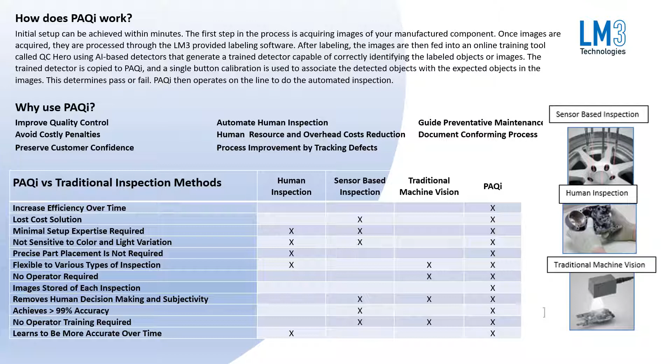PAQi is being used by very big and small American businesses, such as Cooper Standard, Magna, Lear Corporation, Yanfeng, Bayer, Steelcase, CK Technologies, Cascade Engineering, and AGS Technology.

Using PAQi to do physical measurements requires a one-time NI-VBAI license, which runs at approximately $850. QC Hero for detector training is a pay-per-use web-based system at $20 an hour. A complex object detector usually trains in less than 3 hours, or $60 per training session.

LM3 can be hired to do system customization. LM3 also provides affordable accessories including lighting controllers, I/O, breakout boxes and cables, buttons, and LEDs to round out the system and avoid the need for high-cost integration.

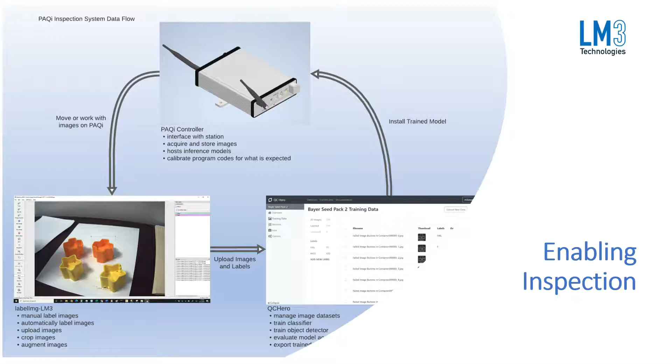The main components inside the PAQi include an Intel NUC running Windows 10 Pro with a solid-state M2 internal hard drive and up to 32 gigabytes of RAM. National Instruments image processing software called VBAI, Vision Builder Automated Inspection, allows a setup to inspect parts and pass or reject using machine vision.

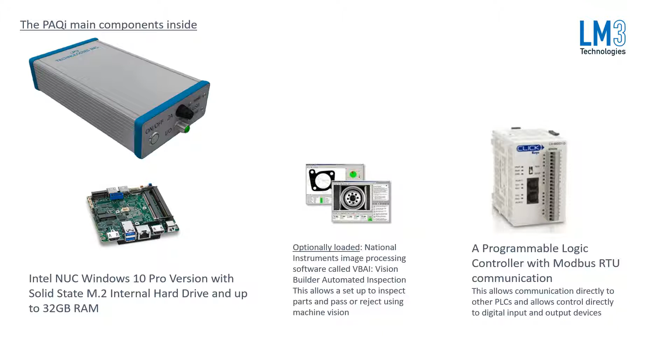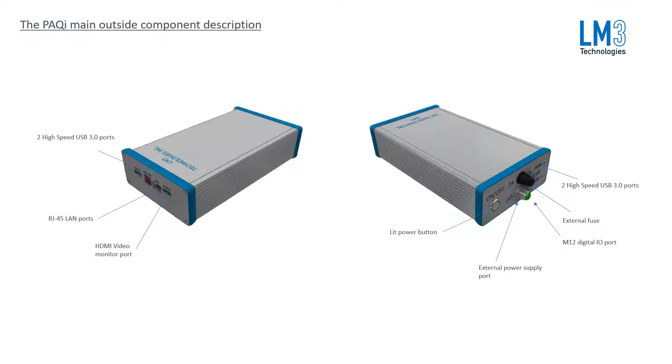Outside of the PAQi, we can see 2 high-speed USB 3 ports, RJ45 LAN ports, an HDMI video monitor port, a lit power button, an external power supply port, an external fuse, and an M12 digital I/O port, as well as 2 high-speed USB 3 ports.

LAN ports allow connectivity to the plant network to store info, transmit failure information, external port-in capability, and communication to MES via Modbus TCP. There's also a lit on/off indicator showing power status at a glance, and fuse-protected internal components. Digital I/O can run stack lighting for visibility or other outputs to external devices, and receive sensor signals to trigger the cycle.

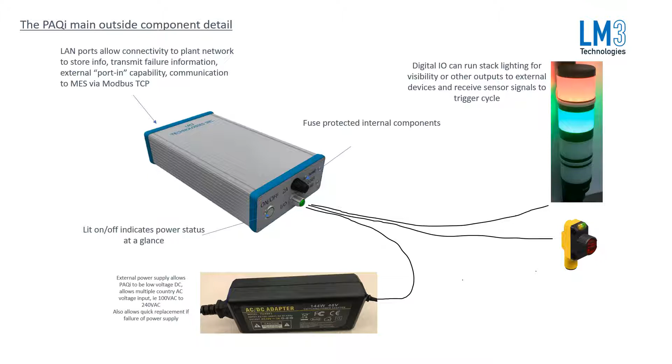External power supply allows the PAQi to run on low voltage DC, allowing multiple country AC voltage input, meaning internationally and within the US. Video output ports allow connection of a monitor to display failures, status, detection information, program setup, and change screens. The digital input allows cycle start, part presence sensors, and light curtain input.

USB ports allow connection to a mouse, keyboard, scanner, printer, etc. The PAQi can also be connected to both Wi-Fi and Bluetooth support.

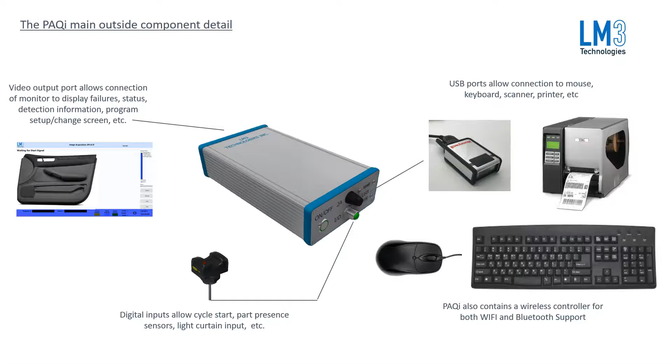Regarding its history, the PAQi was created in 2017. Its first goal was to have a camera device or system that, when triggered, would simply take a photo and save it to a file locally or over the network. The second goal was to link the photo to the product for traceability.

This was initially designed to be triggered by the scan of the product's serial number, resulting in an image stored by that serial number. The purpose was to have traceability pictures for the customer as proof of assembly and assistance in problem solving. Many other cases were similar, and the pictures are named by unique serial number, commonly referred to as warranty photos.

The third goal was to have a unit which could break the price barrier of traditional systems. Current vision systems are expensive, and by reducing the cost of hardware, customers can deploy machine vision analysis across a wider range of applications, leading to a quality control standard.

The system would have to be simple and low cost, such that if there was a failure, it would be quicker to unplug the unit, install a new unit with the program, and be back in production very quickly. The system would also have to be able to handle multiple cameras.

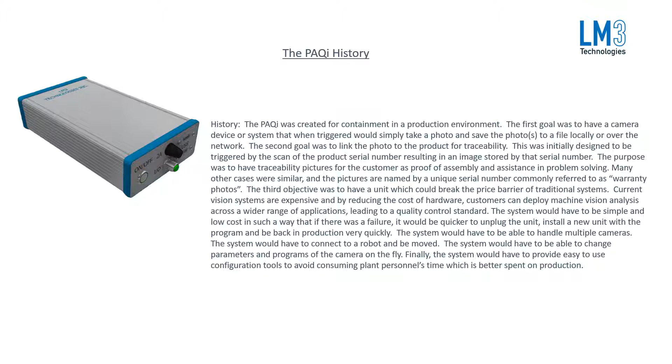The PAQi Functionality Overview 1, the simplest function, is for the PAQi to take photos and store them to a file. The PAQi waits at the start position for a trigger, and once received, it scans the barcode of the part being inspected, captures an image, stores it to the network or locally, and records the results to the station.

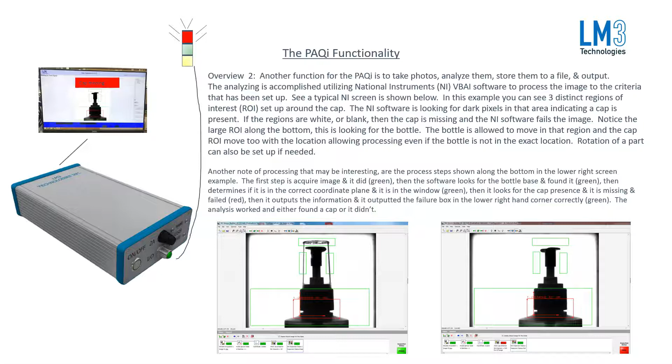The function for the PAQi which takes photos, analyzes them, stores them to file, and outputs information utilizes a licensed version of VBAI loaded into the PAQi. Utilizing this software, or the AI-based setup, can be done by anyone.

The PAQi is used to take photos, analyze them, and store them to a file and output information. This utilizes a licensed version of VBAI loaded into the PAQi. Utilizing the VBAI software, or our AI-based detector training using QC Hero, the user can set up the areas of interest to be inspected. The regions can be set up by anyone, internally or externally.

The analysis is done from multiple images. This is where lighting and resolution are important for the user to develop a repeatable photo that highlights the components or areas that need to be evaluated. This may also involve using different light color patterns or options, as well as UV or IR lighting.

NI offers many tools to evaluate images, including color intensity, intensity detection, particle detection, etc. This allows the analysis to be robust. Using AI-based inspection provides a machine learning-based means to do object and defect detection and classification.

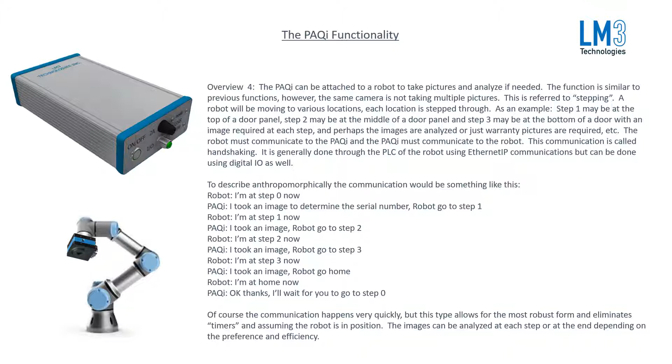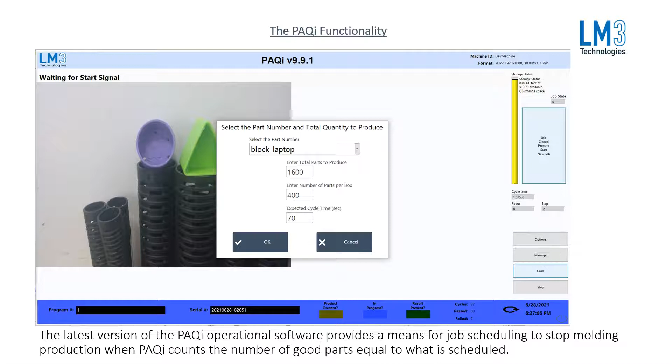The latest version of the PAQi operational software provides a means for job scheduling to stop molding production when PAQi counts the number of good parts equal to what is scheduled.

In production count mode, the PAQi senses when the cycle time of production exceeds expected cycle time and requires the operator to select a reason for the downtime, which allows us to track downtime across the entire job and report OEE metrics.

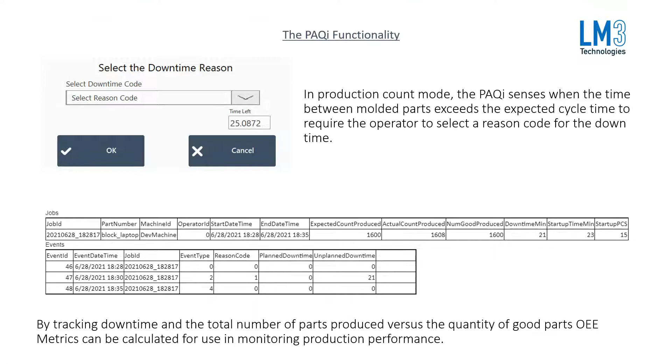Under all circumstances, PAQi stores results to a SQL server, whether it be a local one or one on your network. All individual step results, whether from VBAI measurements or detectors, are stored by their score or measurement value in reference to the image that was taken. This allows for more advanced analysis of production performance.

PAQi is used for a multitude of inspection requirements, including feature presence, defect detection, color classification, physical measurements, and traditional machine vision operation, as well as a combination of object detection and classification, and object detection and object measurement.

Additionally, PAQi can be used to control the entire station or be subordinate to the station's main controller.

Finally, parts can be loosely or not at all fixtured due to PAQi's ability to do object detection anywhere in the field of view, even with inconsistent lighting.

This functionality is powered by artificial intelligence such that a detector or detectors are trained using QC Hero to do object detection of any object in the field of view, including defective objects, or classification, which involves categorizing the entire image in order to determine if it meets the inspection requirements.

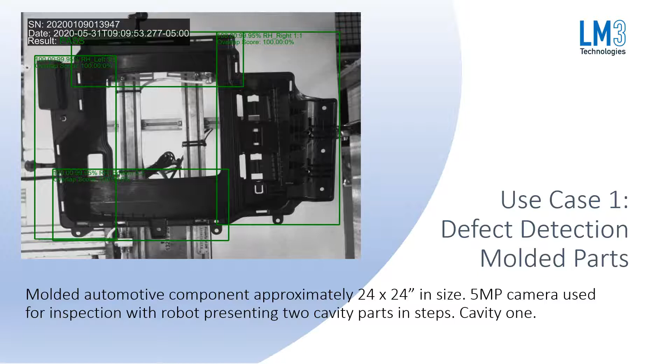So this is a 2-cavity mold. It inspects the left side, the right side, the lower side, and the top side, and here we can see that it's a good part.

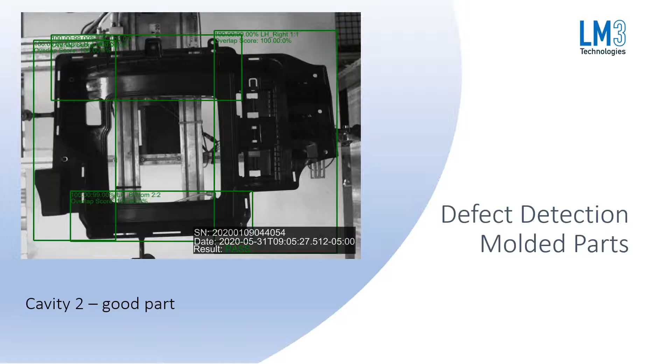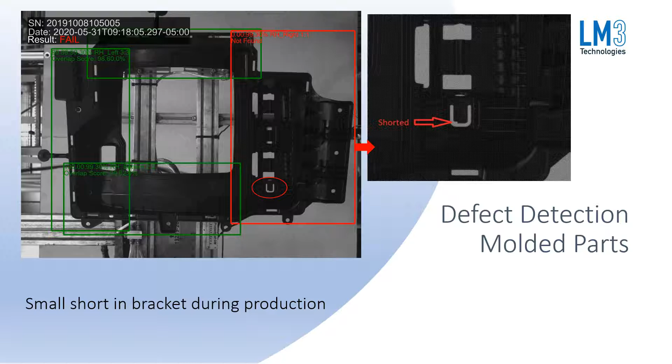Advantages over other systems is that one camera can be used to inspect the entire part versus small regions of the part.

Traditional systems are unable to detect variable defects well because configuration is required by defect type. No special lighting is required.

It's able to keep up with production line due to the ability to take one image of each cavity and analyze the image once. It also has one trained detector across multiple molding machines running the same part.

One trained detector can be used for object detection on the same part of different colors. It has multiple detectors which can be used for varying degrees of defects. Detectors can be continuously trained on new images to improve its accuracy over time.

And the mounting of the camera is less arduous because the camera can be positioned several feet from the part, and the cost of the system is significantly less than traditional systems that would require up to 10 smart cameras at $2,500 per camera plus integration.

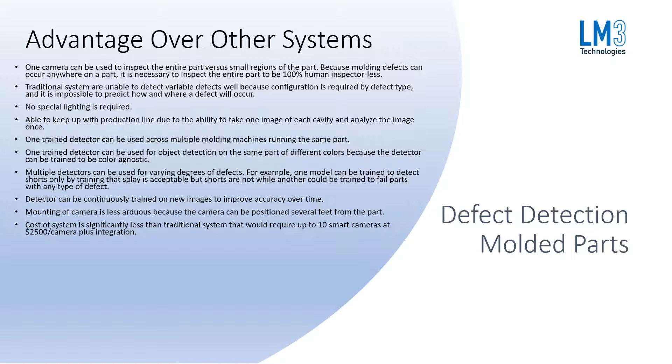The next use case is parts presence for hog rings.

Detecting the 5 hog rings that hold the cover over the airbag bolster. Notice the black material on this bolster.

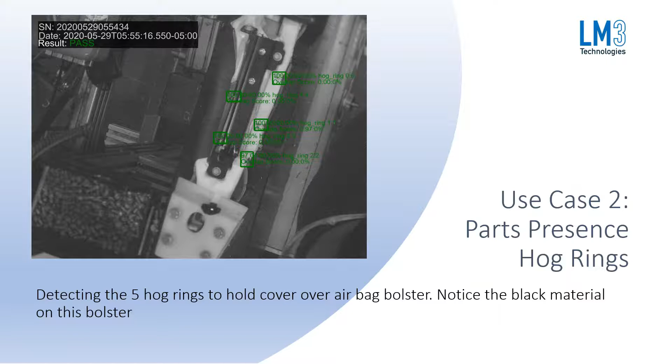Knowing that the 5 hog rings are in place is essential to the airbag working. Here we can see that the PAQi recognizes the hog rings even on a lighter color, compared to previously when it was on a darker color.

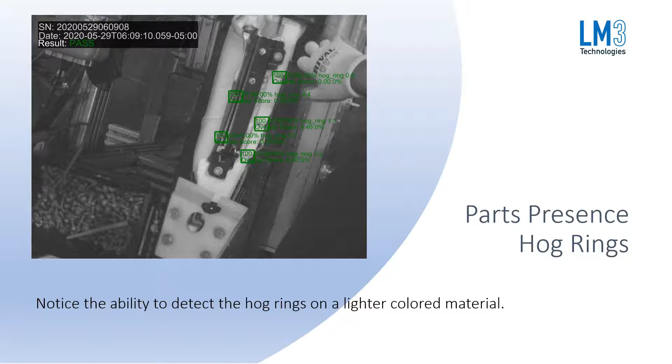We are also able to mount a single camera on the overhead lighting structure is used to make sure it is out of the way of a sliding torque tool that is used to fasten the airbag to the console frame. After the operator fastens the cover to the frame, as shown in the above sequence, the operator eventually inserts the 5 hog rings to complete the operation.

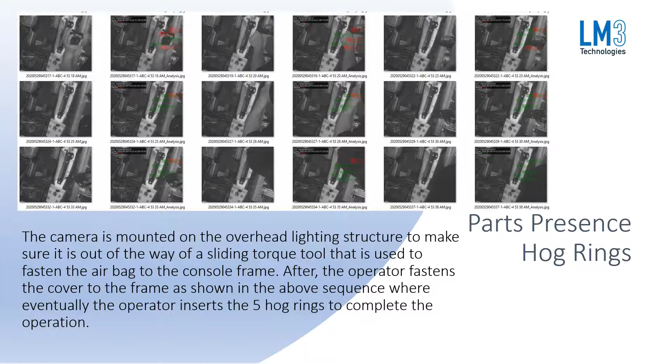The advantage over other systems in relation to hog rings and detecting them is that the PAQi only uses 1 camera and it can be used at a long distance from the part. In traditional systems, they're unable to detect small silver objects on a white background, and the PAQi can do that.

1 trained detector can be used for the left and right side, as well as 2 different assembly fixtures, with slight differences in camera angle and fixturing. There's no special lighting needed, and the cost of the system is significantly less.

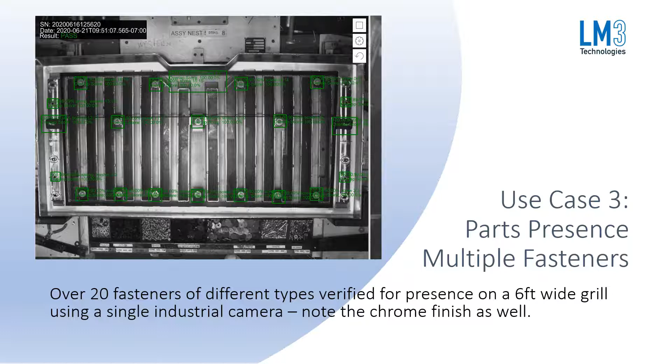Multiple fasteners versus multiple objects of the same type. This detector's been trained to spot screws, clips, brackets, and bug screens on a very large grill. This grill is over 6 feet wide, and it's only using a 10 megapixel camera on the overhead structure, so that it's out of the way of the operator.

Similarly to the other advantages, you can use 1 camera. The traditional systems are unable to detect small objects. The PAQi is able to detect the small objects anywhere in the field of view, regardless of its rotation or left to right positional differences.

1 trained model can be used for the left and right side, as well as 2 different assembly fixtures, and there's no special lighting required. The cost of the system, again, is significantly less than any traditional system that would require up to 15 plus smart cameras at $2,500 per camera.

In this case, we're doing something similar again, with parts presence of push pins, but here it is black push pins on a black substrate, detecting several of these 7mm push pins on both the left and right hand side of the part.

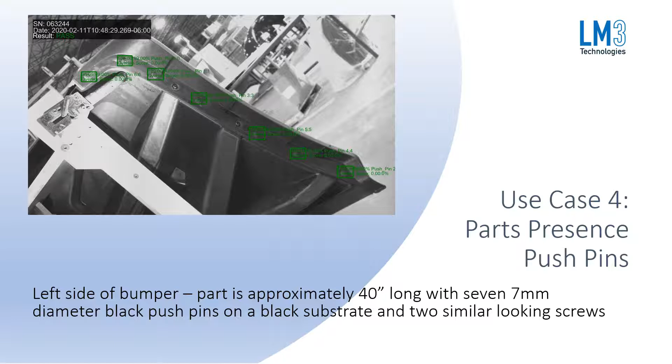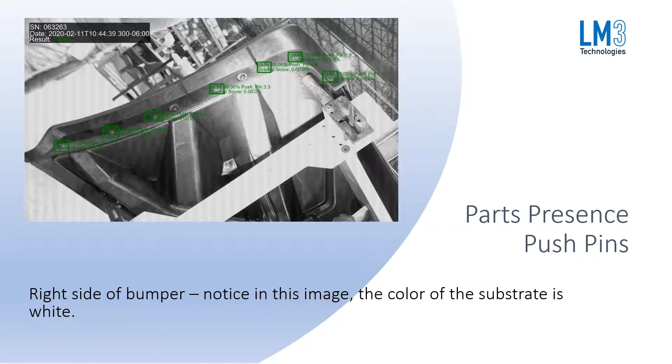Here we can see the right side of the bumper, and in this case the color of the substrate is white and the PAQi is still able to detect it. It also detects missing push pins even when there's a worker in the area distorting the background image.

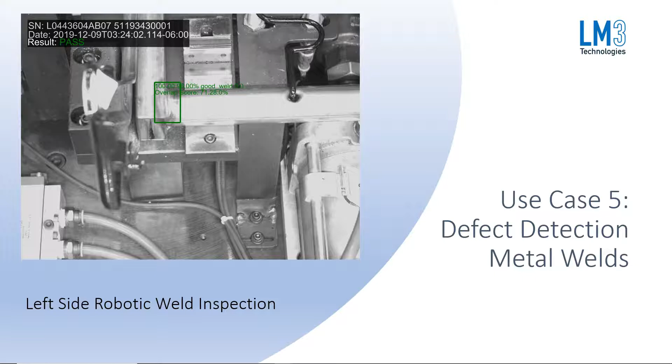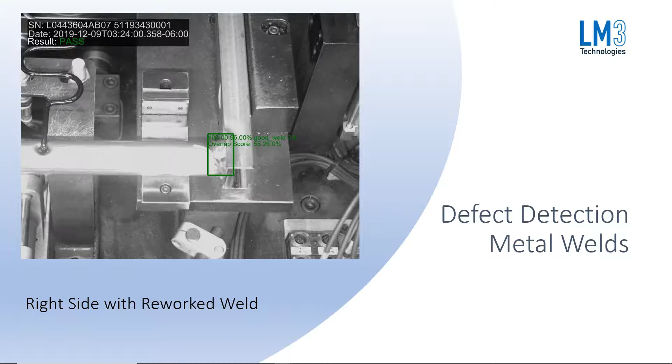The advantage over other systems in relation to the metal welds is that no special lighting is required. The fixture contains an adjustable overhead light, so we trained on the high and low settings to allow for reliable inspection for each setting. Because high focal length lenses can be used with our cameras, the cameras can be mounted in a position out of the operator's working area.

Traditional vision systems are not capable of detecting welds with a high degree of variance. While a traditional system may be programmed to detect large burnouts using black pixel counting, smaller burnouts and pitting cannot be reliably detected. 1 model can be used for defect detection.

This model works for the left and right side weld, as well as welds produced by multiple robots and human welders. The model can be continuously trained to be more accurate over time without the need for an expert vision system engineer.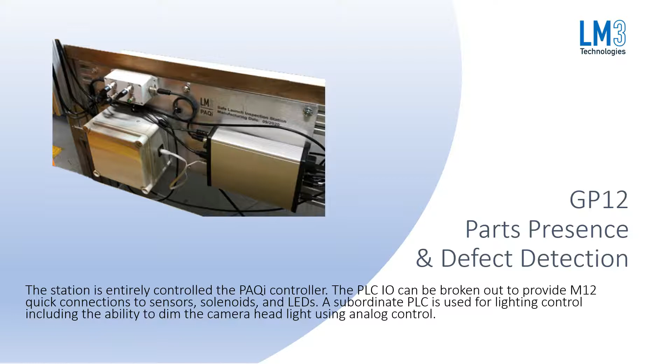Here we have the PLC I/O, which can be broken out to provide M12 quick connections to sensors, solenoids, and LEDs. A subordinate PLC is used for lighting control, including the ability to dim the camera headlight using analog control.

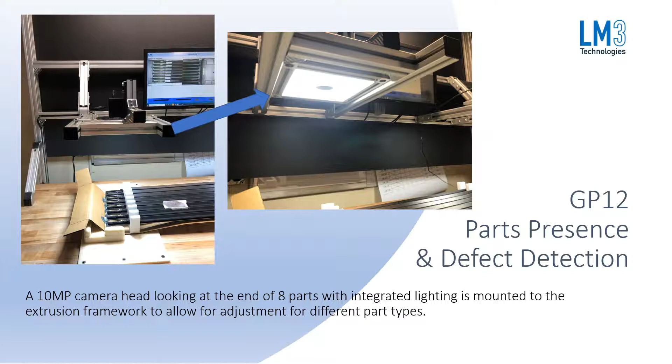Here we can see a 10 megapixel camera head looking at the end of 8 parts with integrated lighting, mounted to the extrusion framework to allow for adjustments for different part types, which can be very beneficial. Here we can see the actual images of the GP12 running.

We detect the presence of black foam on a black substrate, the presence and location of the datum clip, which is the image on the right, and the presence of a small piece of black foam stuck on top of the longer piece of foam.

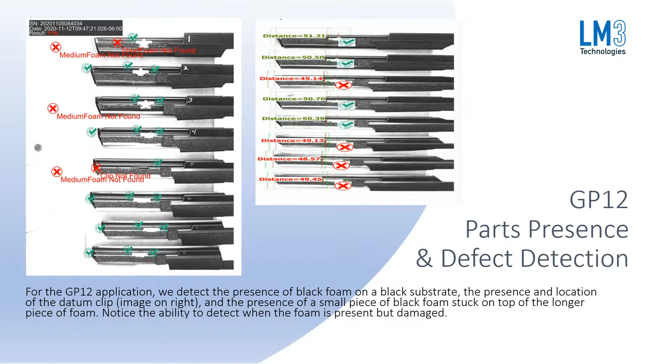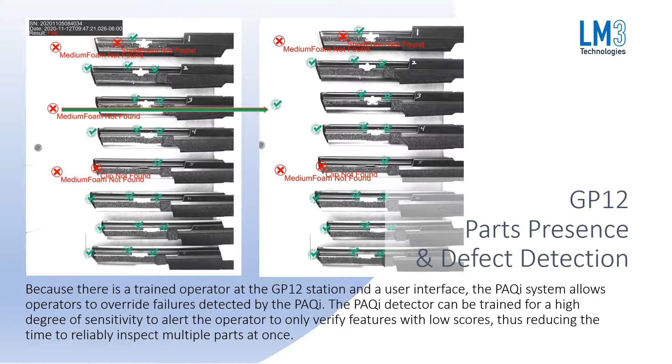Here we can notice the ability to detect when the foam is present but still damaged. The trained operator at the GP12 station uses an interface. The PAQi system allows operators to override failures detected by the PAQi. The PAQi detector can be trained for a high degree of sensitivity to alert the operator to only verify features with low scores, thus reducing the time to reliably inspect multiple parts at once. So it's a time saver as well.

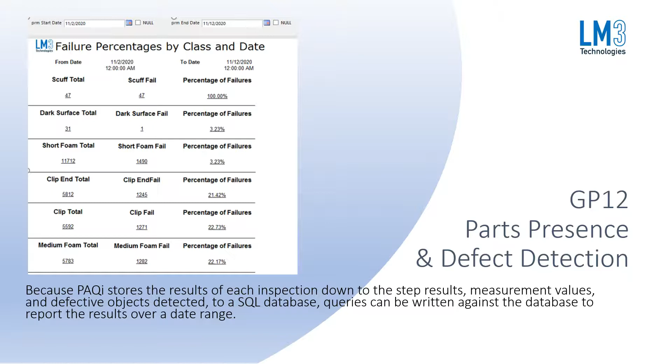Because of PAQi's precision in storing the results of each inspection, measurement values, and defective objects detected to a SQL database, queries can be written against the database to report the results over a date range.

The GP12 parts presence and defect detection saves money in the following ways. Reduction in the number of human inspectors required for safe launch because the system can inspect multiple parts at once in seconds. It reduces inspection time, which reduces the number of operators and the shop floor space required. It improves quality control to shorten the containment time during GP12 or other customer-required safe launches. It reduces or eliminates customer paybacks for out-of-spec parts. It reduces scrap by signaling when a production machine is running out of spec.

It is up to 1/5 of the cost of non-comparable but competing vision systems. It reduces the time to launch and exit safe launch. It is a machine capable of working 24/7 without fatigue, distraction, and without a salary. It also does not get sick, need a mask, or require social distancing. It gets smarter the more you teach it and can achieve a 6 Sigma level of quality control. It allows you to dedicate human resources to production tasks machines are not capable of doing.

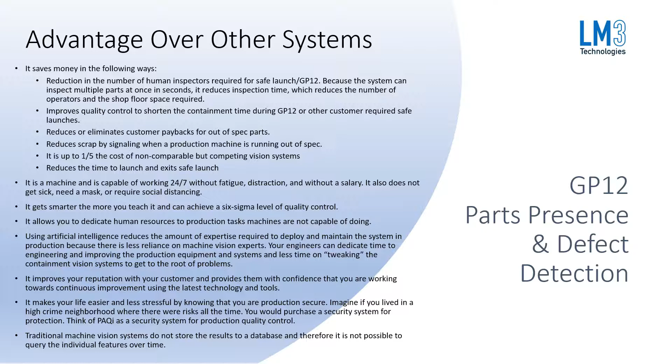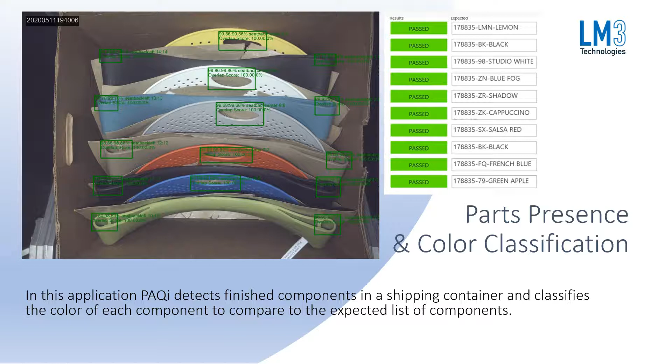Lastly, we're going to go over parts presence and color classification. In this application, PAQi detects finished components in a shipping container and classifies the color of each component to compare to the expected list of components. If the components are placed in the box incorrectly or out of order, PAQi alerts the operator to make corrections to prevent the customer from receiving components they did not order.

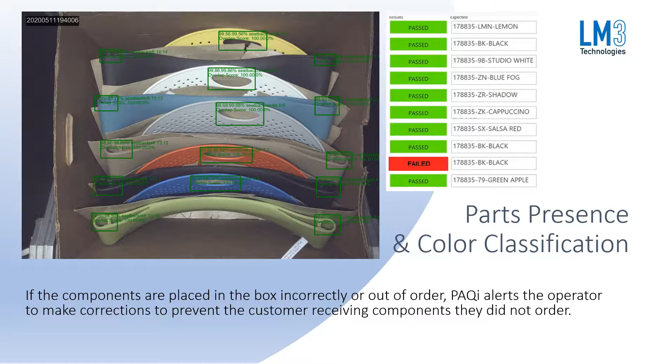Defect detection molded parts have more of an advantage than other systems because PAQi can be used to control the entire station using the onboard PLC to connect custom-built applications with PAQi's core image acquisition and analysis software. It has the ability to find the parts regardless of their position in the box prior to color classification. Deep learning color classification is more accurate than traditional machine learning classifiers because not only does deep learning tune parameters as it learns, but it also tunes the underlying algorithm using the parameter.

Color classifiers are built on TensorFlow with AutoML to optimize classifier construction prior to training. Deep learning color classifiers are trained using QC Hero LM3's online classifier training tool. The color classifier can be continuously trained to improve.

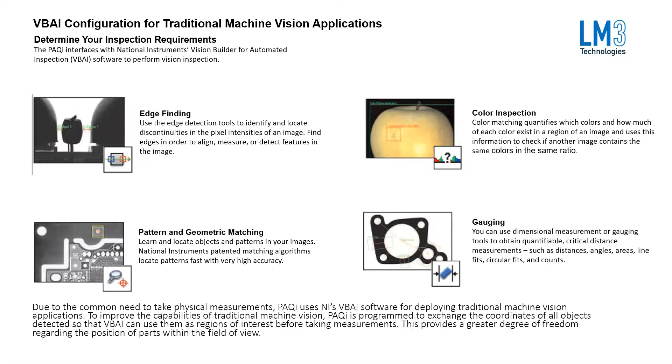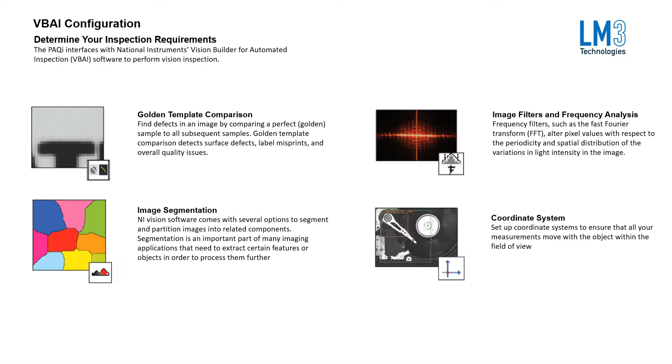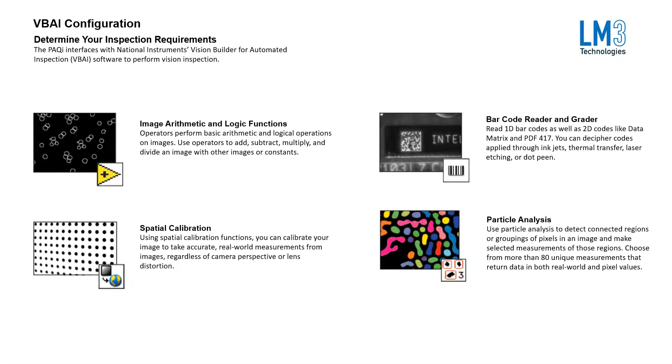VBAI can be used for edge finding, pattern and geometric matching, color inspection, and gauging. Golden template comparison, image segmentation, coordinate system, image filters, and frequency analysis. There's also image arithmetic and logic functions, spatial calibration, barcode reader and grader, which are measurement applications.

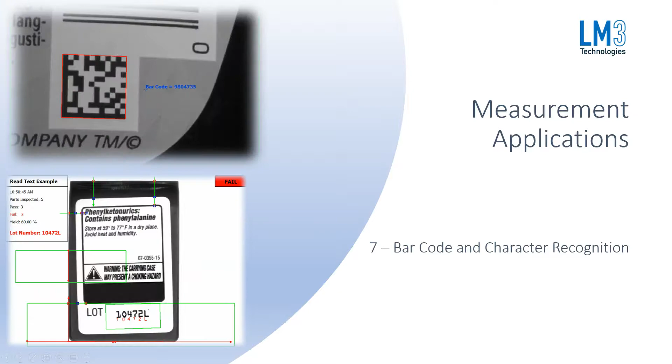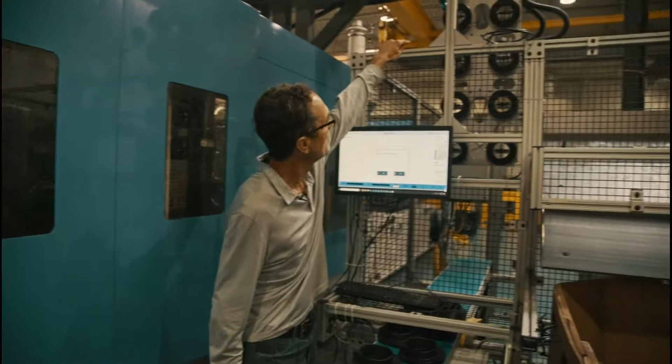This is our PAQi system, which is used to do vision inspection of molded parts using deep learning. Up top we have a camera that's looking at each part individually as it's moved by the robot. We have a user interface that details what is happening during the inspection process. Right now the machine is in a state where it's waiting for a new job.

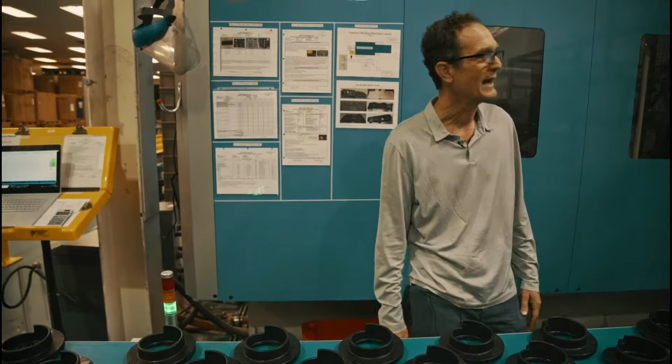You'll notice over here to the right, there's a green light that tells you you're in a running mode. At that point, the machine is inspecting each part individually for defects and also keeping track of how many parts have been produced, notifying the operator of the machine when the box is full and when the job is complete as well. Additionally, we keep track of downtime. So if the machine delays for some reason, we ask for a reason code so that we can track any kind of down events for use in OEE as well.

So as you're watching the machine, it's going through the inspection process, feeding back to the robot pass or fail. When a part fails, it's dropped in the reject bin. When a part passes, it goes on the finished goods conveyor.